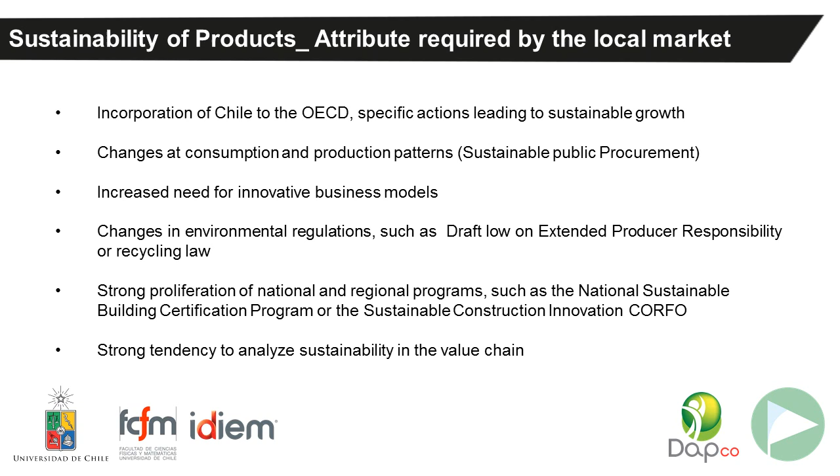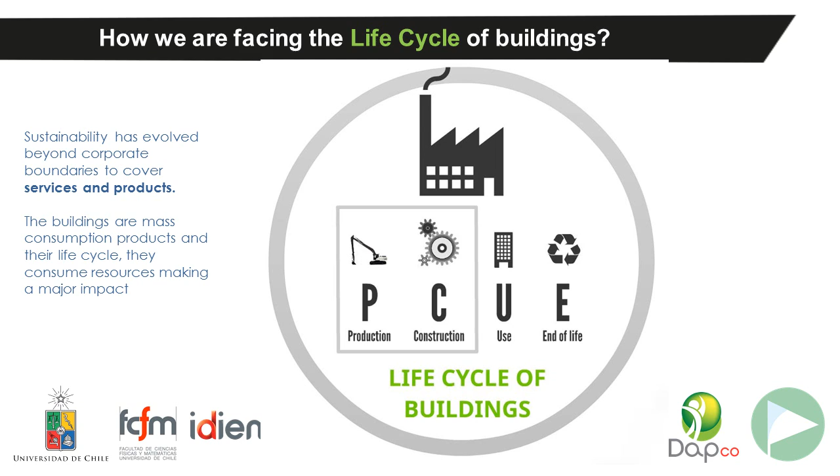In this context, we are wondering, how are we facing the life cycle of buildings? Nowadays, sustainability has evolved beyond corporate boundaries to cover services and products. It's important to say buildings are mass consumption products, and in their life cycle they consume resources, making a major impact.

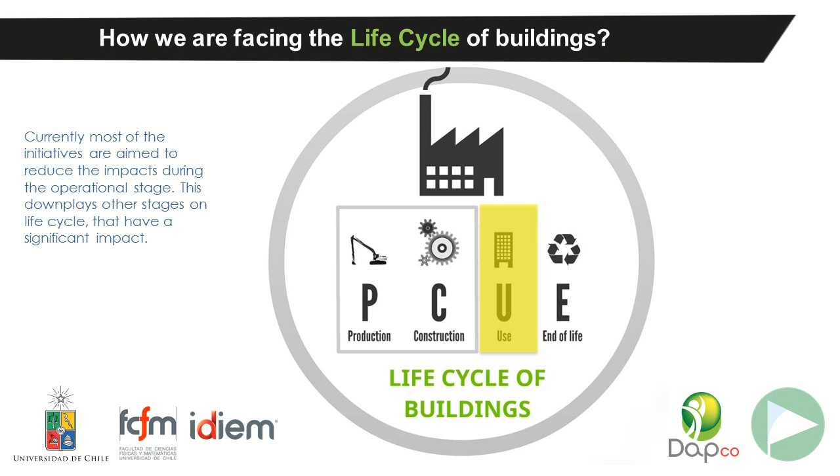So currently most of the initiatives are aimed to reduce the impacts during the operational stage. This downplays other stages on the life cycle of a building that have a significant impact. In other words, we are concentrating all the efforts on one single stage, for example, all the initiatives related to energy efficiency, and we are ignoring the others.

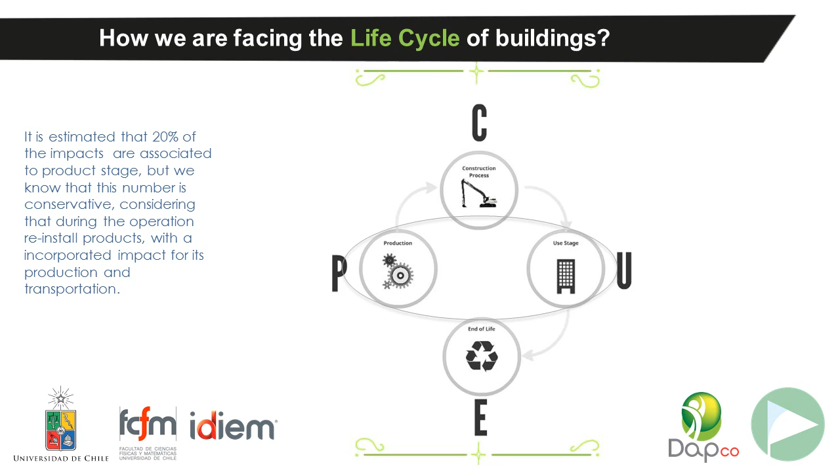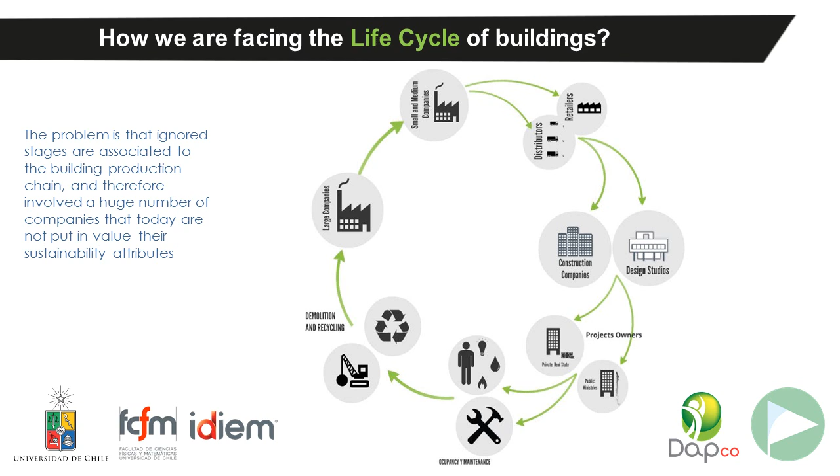It is estimated that 20% of the impacts are associated to the product stage, but we know that this number is conservative, considering that during operation, we reinstall products with an incorporated impact from their production and transportation. In this way, we are not viewing the life cycle as an interrelated cycle. The problem is that the ignored stages are associated to the building production chain, and therefore involve a huge number of companies that today are not putting value on their sustainability attributes.

So we have an opportunity, the opportunity of making the building value chain visible. So we are talking about transforming the supply chain into a value chain. When all companies involved in the creation of shared value, the supply chain transforms into a virtuous circle.

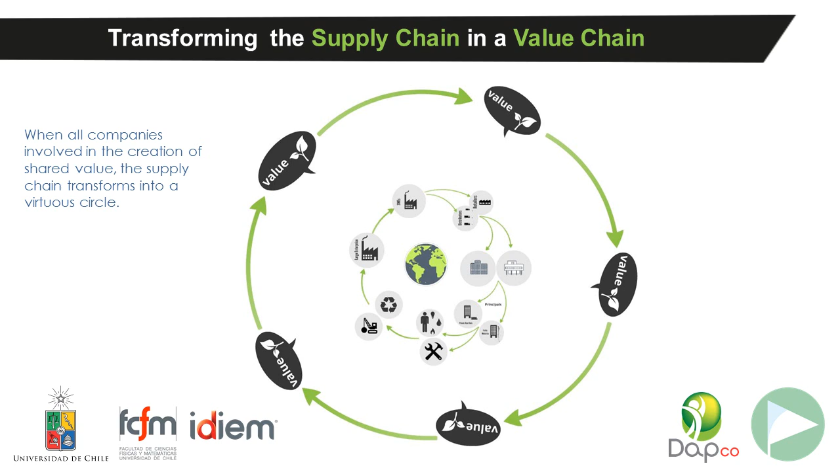How do companies add value through sustainability? At this point, it's essential to highlight environmental accounting, which is possible through environmental communication. So the EPD is key for companies to begin to add value to their products.

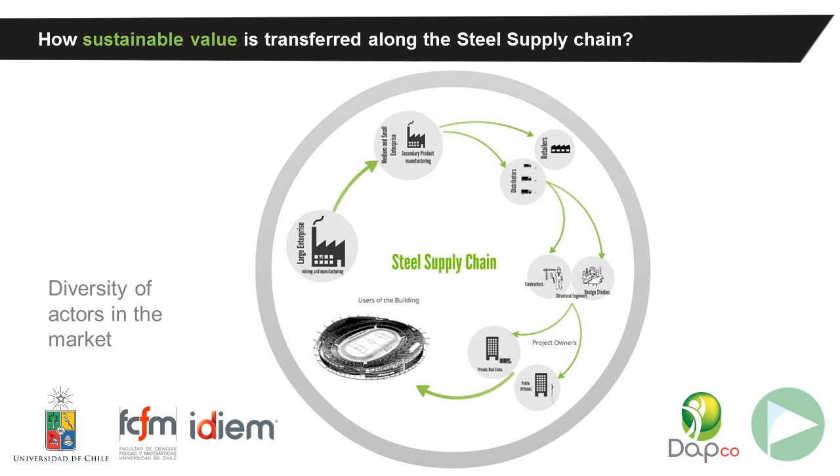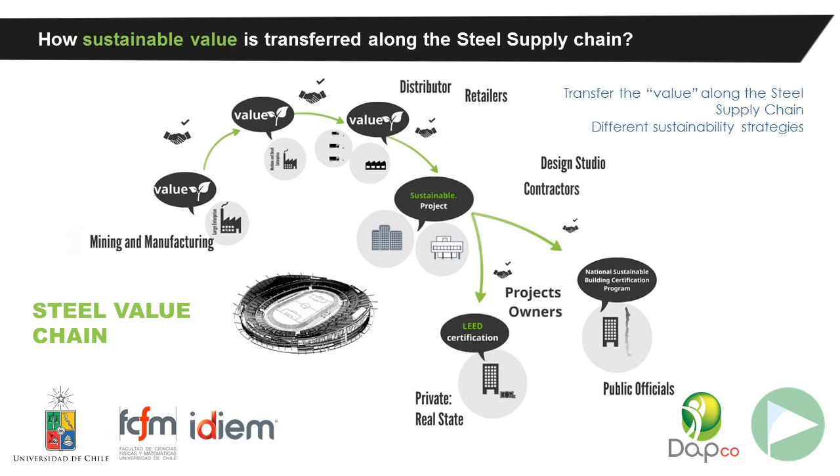How is this sustainable value transferred along the steel supply chain? For example, in this particular case of steel in Chile, we have different actors, a diversity of actors in the market. So from the first actor, the large enterprise, to the end user, we have to transfer the value along the steel supply chain. And for that, we have different sustainability strategies.

For understanding these strategies in a better way, it's important to know and consider the context of the problems of sustainable building in Chile. First, we have a lack of knowledge about the supply and value chain as a whole. Second, a focus on specific sustainability practices, as it says, for example, on specific stages. Third, a lack of a standard method in the evaluation of sustainability, a lack of a quantitative evaluation system, and related to this, a lack of local databases.

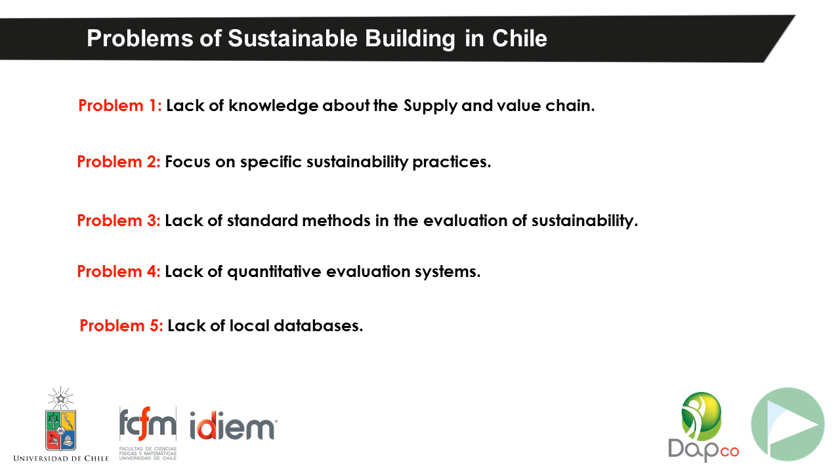In this context takes place DAPCO, the Environmental Product Declaration Program for construction materials, according to ISO 14025. Its mission is to strengthen and encourage sustainable construction market transparency by declaring the development, selection, and disposal of construction products at the end of their useful life, promoting the life cycle perspective in construction.

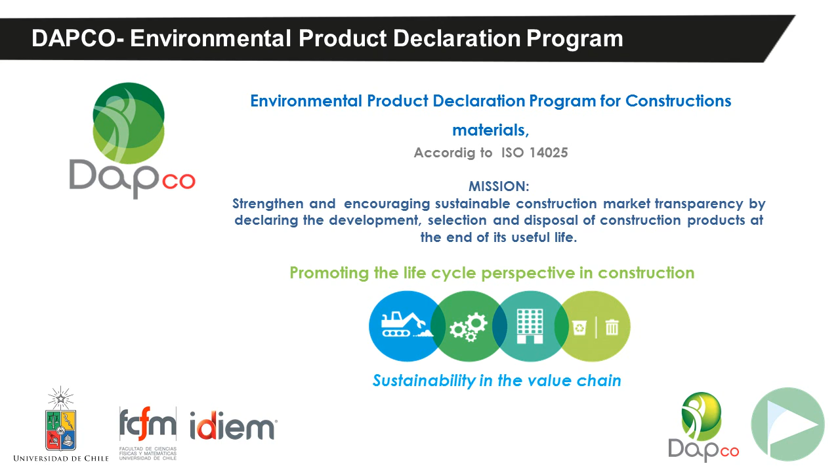DAPCO has a structure. At first place, we had an advisory council, composed of institutions that have a say in the formulation of the rules of the program. Then we have the sectoral panels for each product category, where companies involved are looking mainly for the formulation of the product category rules. Then we have companies providing materials, estates and constructors, professionals and students, offices of architecture, engineering and construction, and finally consultants. Through this structure, form is given to the program in order to establish the rules of DAPCO and the formulation of the product category rules.

The product category rules, the PCR, is a set of specific rules, requirements, and guidance for developing environmental product declarations for one or more product categories, according to ISO 14025. Then we have the analysis, the life cycle assessment, LCA.

That is a compilation and evaluation of the inputs, outputs, and potential environmental impacts of a product system through its life cycle, according to ISO 14040. And finally, we have the declaration, the Environmental Product Declaration, EPD, that provides quantified environmental data using default parameters and, where appropriate, additional environmental information.

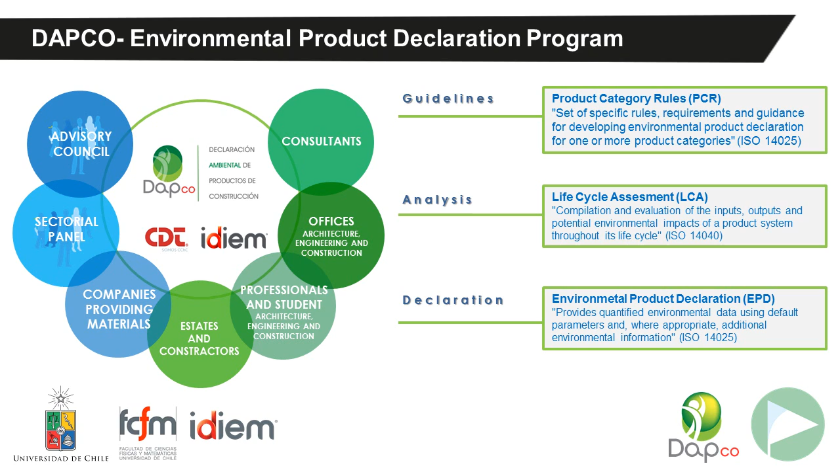It's relevant to say that the EPD is a kind of summary of the LCA, which will contain the main impacts associated with the product, according to the PCR. The EPD is an eco-label type 3, and it must be verified by a third party who supports the proper application of the standard and the product category rules.

At the EPD, we will find information about the program, about the enterprise who is declaring, about the product declared, the PCR used, the validity, also information about the institution who is verifying the information, then a product description, the application, also about the LCA scope or system boundaries, then the life cycle stages, and most importantly, the impacts.

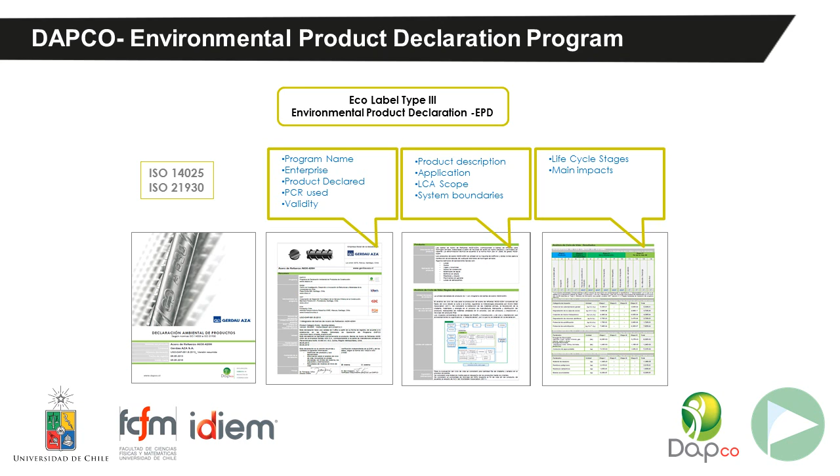So, if we look at our scheme again, we can say that the EPD is an effective way of transferring the sustainable value along the value chain, from the first actor, the large enterprise, to the end user.

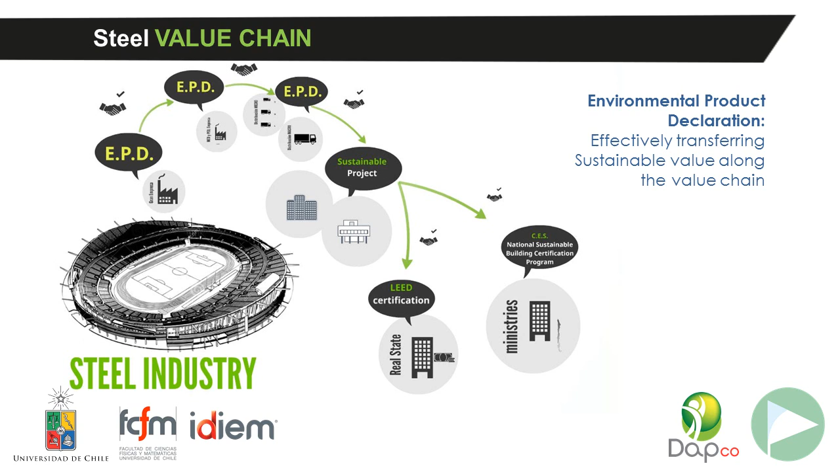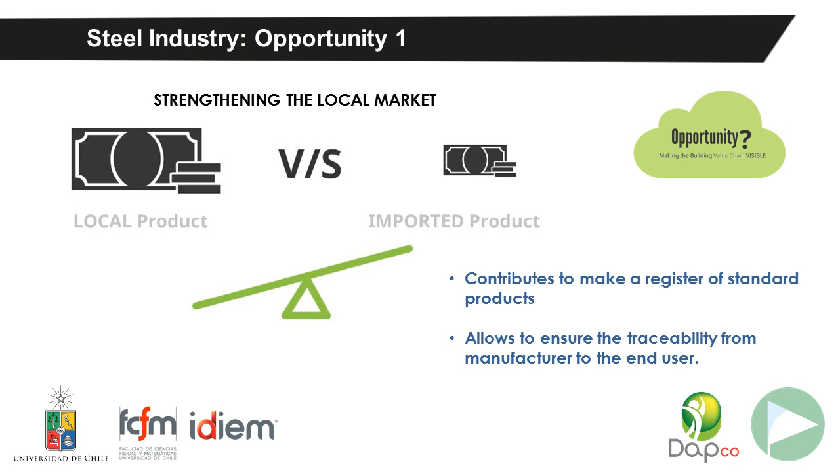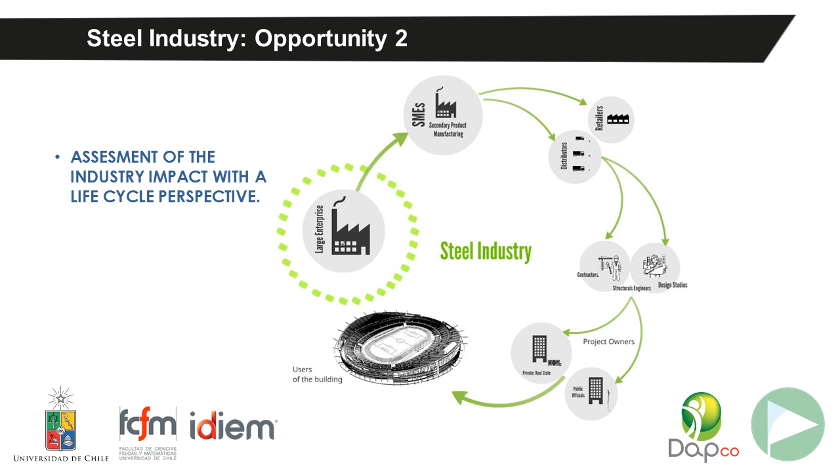At the specific case of steel, we have the opportunity of strengthening the local market. Today in Chile, we have an important entrance of imported products, and in this context it is relevant to start declaring. The EPD contributes to making a register of standard products and also allows ensuring traceability from manufacturer to end user. Also, we have the opportunity to make an assessment of the industry impact with a life cycle perspective, generating value from the large company to the end user.

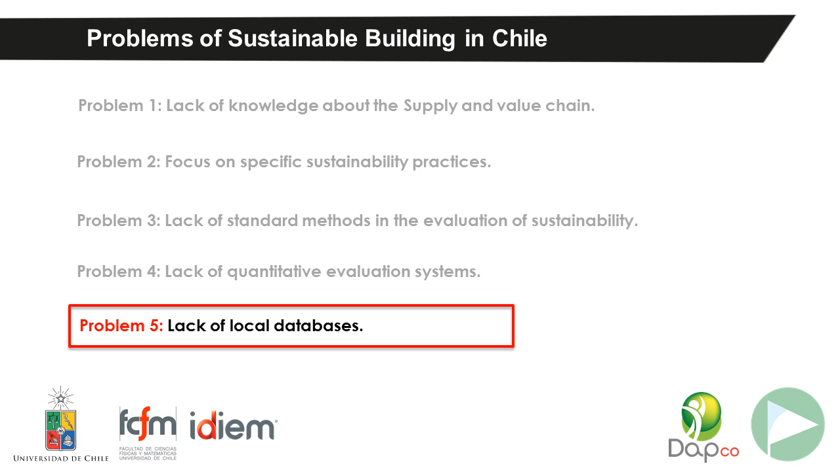So, if we focus on the problems of sustainable building in Chile, we already have the tool, the EPD, but there is still one problem remaining: the lack of local databases. According to that, the project Ecobase Construcción took place.

Ecobase Construcción's main objective is to implement and promote a technology platform, developing a database of environmental information for the main materials used in construction under the LCA methodology. Ecobase is a project supported by Corfo, the Production Development Corporation of Chile. As a first step, Ecobase addresses the creation of national inventories.

Then, as a second step, we have design building, simplified LCA tools, preliminary design tools, and LCA integrated with CAD design tools. Then we talk about materials and products, and here we have all the eco-labels, types 1, 2, and 3, the environmental product declarations.

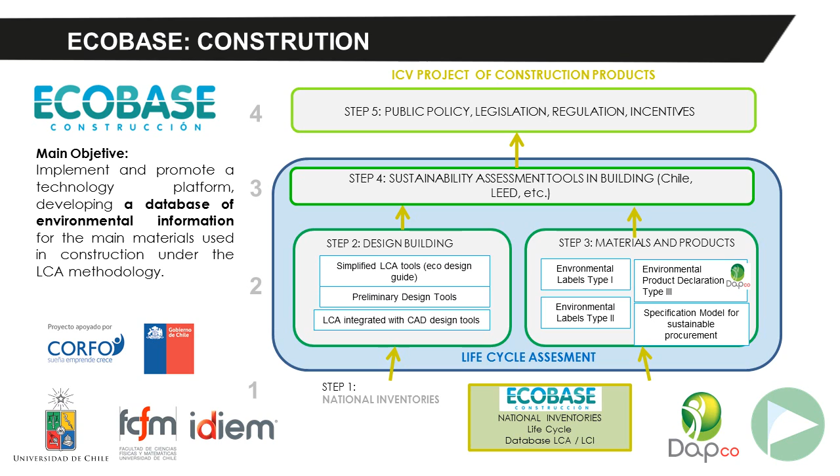Then, as a fourth step, we talk about sustainability assessment tools in buildings, here we have the certifications. And finally, we have public policy, legislation, regulations, and incentives. This is the structure of Ecobase.

The project had different actors. As principals, we have the Environmental Ministry, the Ministry of Housing and Urban Development (MINVU), the Chilean Construction Chamber, and the Institute of Construction. As beneficiary is the Universidad de Chile, IDIEM. As implementing partners, we have Fundación Chile and CDT. Then the offerer who will administrate the tool once it's finished: the Environmental Ministry, the Chilean Construction Chamber, and also the Institute for Construction.

It's very important to say that the final beneficiaries of this project will be all the building industry companies.

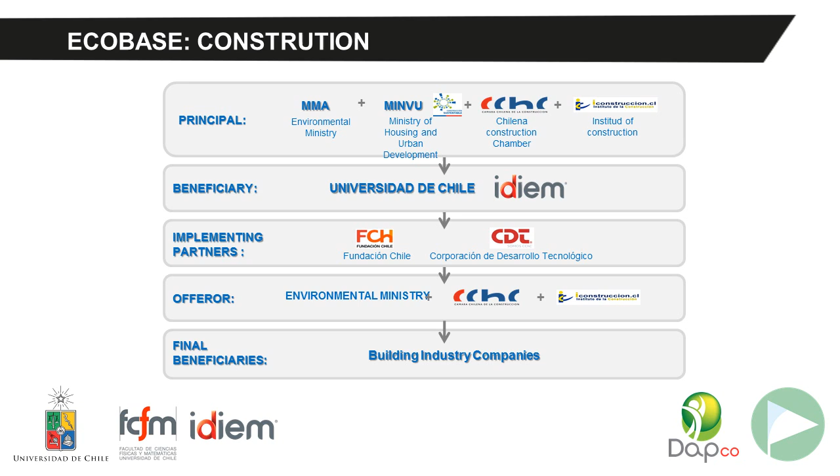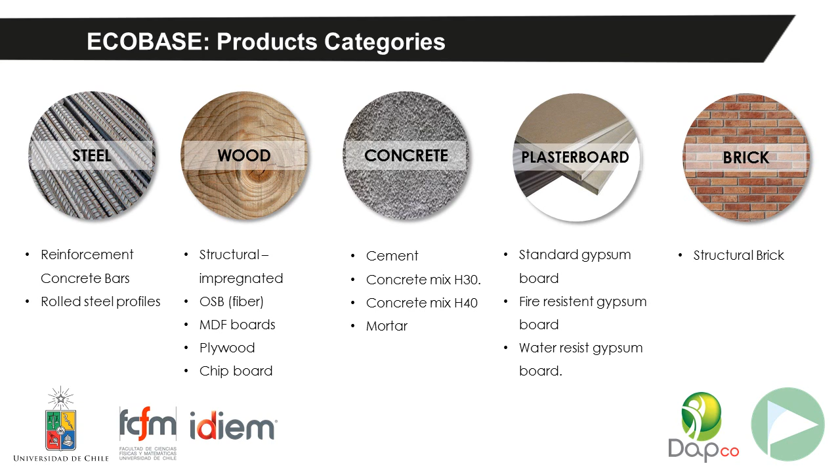Then we have the product categories. Ecobase is working with 5 category products: steel, wood, concrete, plasterboard, and brick. For each one we have a series of different products. For steel we have reinforcement, concrete bars, and rolled steel profiles. In wood we have structural impregnate wood, OSB, MDF boards, plywood, and chipboard. For concrete we have cement, concrete mix H30, concrete mix H40, and mortar. For plasterboard we have standard gypsum board, fire resistant gypsum board, and water resist gypsum board. Finally we have structural bricks in the brick category.

In the regulation of data process, it was very important to visualize the process diagram for each product category. This is an example and is the result of that regulation of data process. We can see the different inputs and outputs for the case of concrete, and it is one diagram for each category product.

It's important to say that Ecobase considered the life cycle from cradle to gate. You can see at the center rectangle each process unit with the elementary information that generates the final product, in this case the concrete products: H30, H40, and mortar.

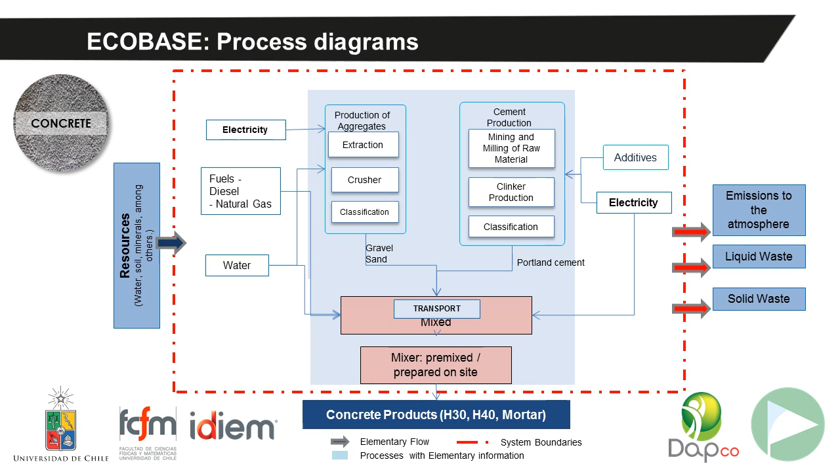Here we have the preliminary results for Ecobase inventories. This is one of the impact categories evaluated in Ecobase: global warming potential. At this point, it's very relevant to mention that there are different functional units for each product, so they are not comparable to each other. For analysis, we can take the case of concrete.

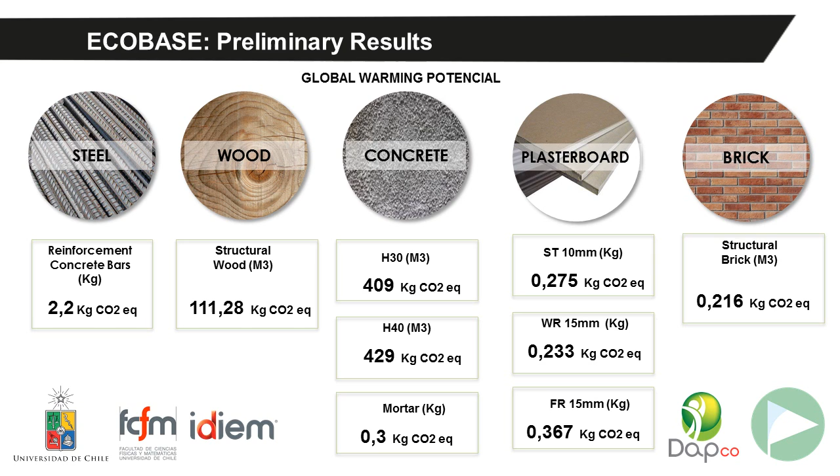We have 409 kilograms of CO2 for 1 cubic meter of concrete mix H30, for example. In this chart, we can see that the cement process is the most contributor to global warming potential in both cases, concrete mix H30 and concrete mix H40. We can analyze in the same way for each product category and also for each impact category evaluated in this research.

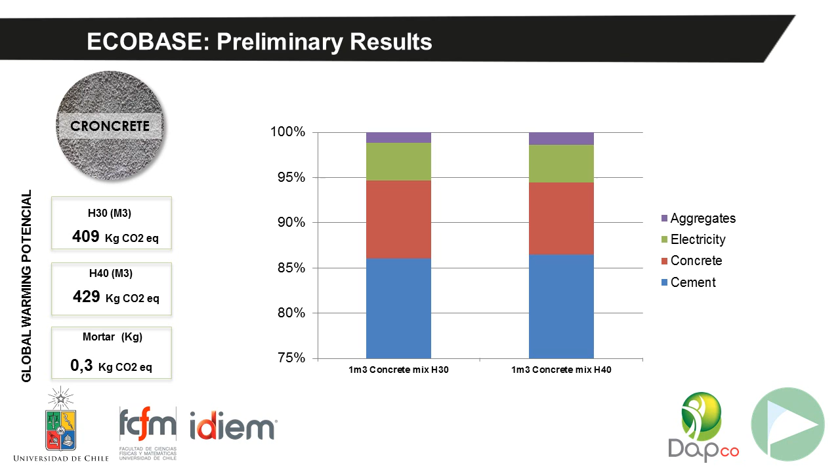So, how will Ecobase benefit large companies and small and medium enterprises? For the first ones, it helps assess their environmental impacts, and for the second ones, know their environmental impacts. Also, Ecobase will allow the identification of hotspots, reduce environmental impacts, and improve competitiveness. Ecobase will provide an environmental platform that will benefit the whole building industry, allowing it to calculate a simplified LCA of their associated impacts.

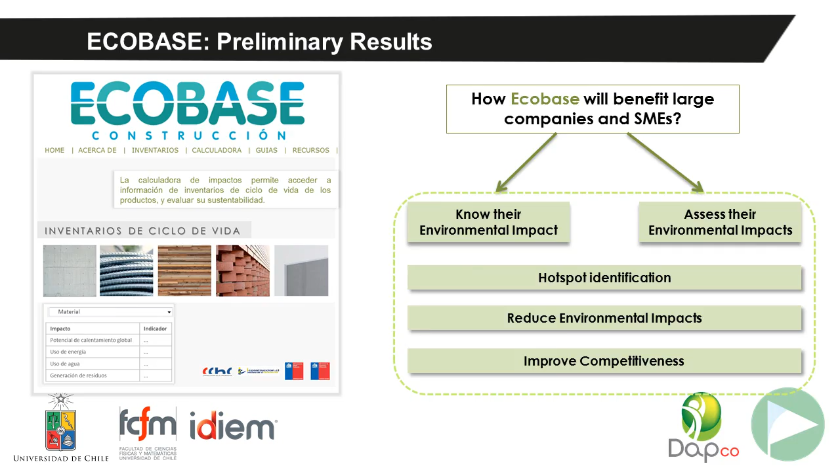So, what's next? For the future assessment of the incorporated impacts, a structural system contributes 50% of the embodied energy in a building. If we took the preliminary result of Ecobase and compared it with international benchmarks like the numbers from the Athena Institute of Canada, we know that our results are still higher.

Anyway, we took that result of 1 cubic meter of concrete and applied it to a building. In this case, we worked with the second building in the world with an environmental building declaration, the Lafarge Innovation Hub. This building had 1,147 cubic meters of concrete, and if we apply our Ecobase result, we get 471 tons of CO2. Imagine that is just for one building.

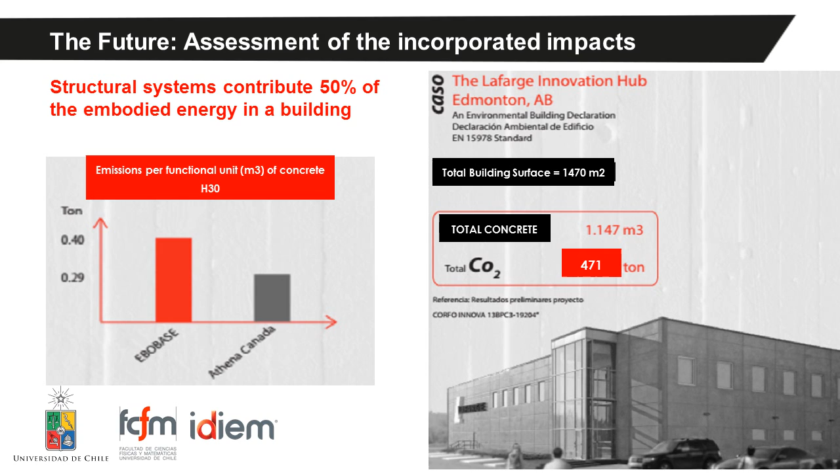But what does that amount mean? Just 1 ton of CO2 is equivalent to one car working 110 hours at 60 kilometers per hour. Put another way, to eliminate 1 ton of CO2, we would need 250 trees transforming CO2 during 1 year. So, just to neutralize one building, that's the math.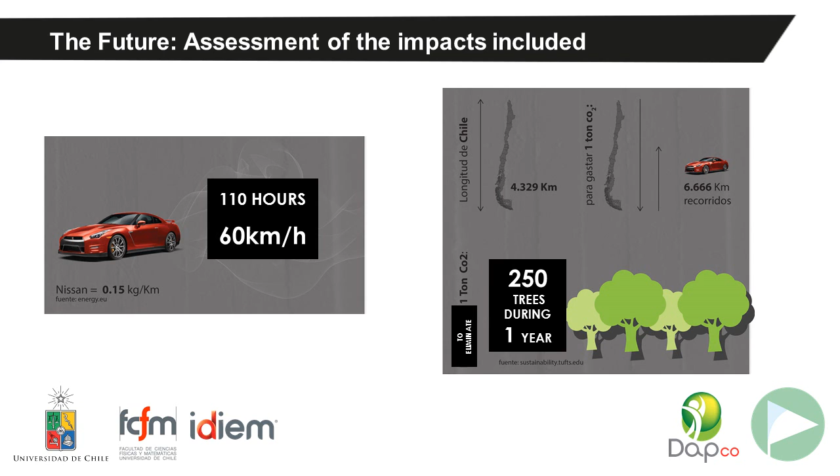If we visualize this, we can see the relevance of measuring the impacts of buildings with a life cycle perspective. For that, we have these tools: environmental product declarations and Ecobase as an environmental database information system. Both help transfer sustainable value, transforming the production chain into a building value chain where everybody wins.